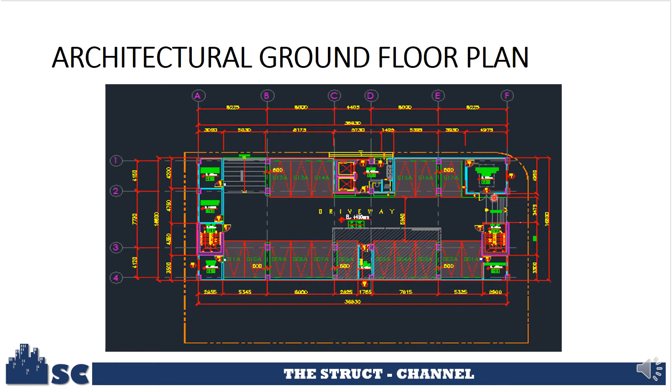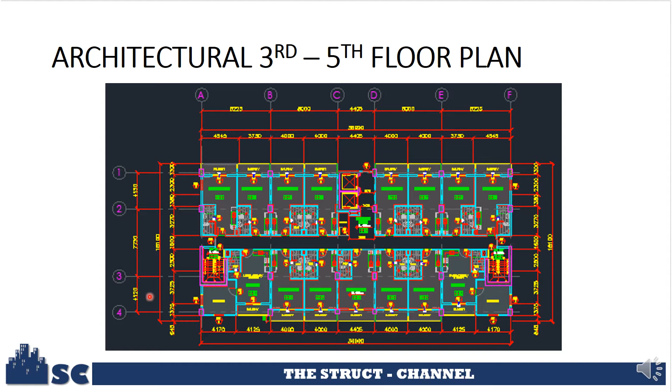This is a typical third to fifth floor plan of the building. The elevator is at the middle or center of the building, and there are two fire exits located on the left and on the right wing of the building.

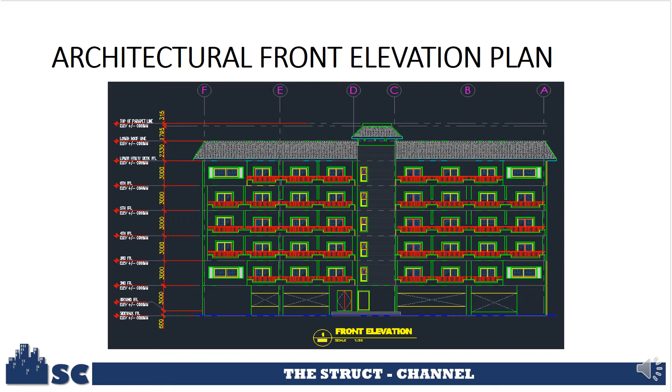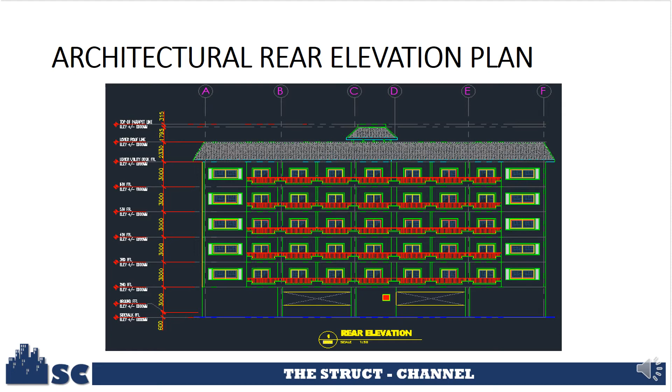This is the rear elevation. Very similar to the front, there are wide window openings and car entrance and exit openings.

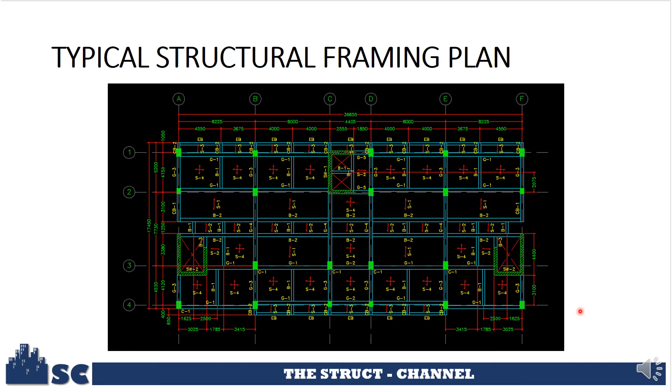This is a typical structural framing of the building. Now, during the scheming part, we were able to convince the architect that we need to avoid a soft story being developed on the ground floor against seismic earthquake loadings. We were able to convince the architect to make us use of the stairwells as shear walls, same thing with the elevator shafts, to produce stiffness and rigidity on the buildings against earthquake loadings.

For the design criteria, design code shall be the National Structural Code of the Philippines, Volume 1, 2015, and all of the material structural properties and the design loads should conform with the NSCP 2015.

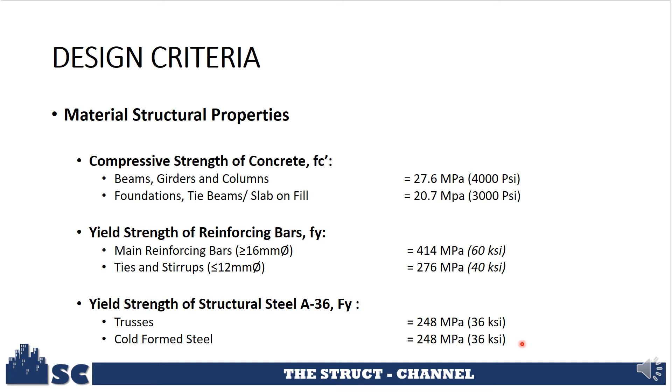The concrete that will be used shall be 4,000 psi for the beams, girders, and columns, and 3,000 psi for the foundation. For the reinforcing bars, we will be using high-grade steel. For the ties and stirrups, we will be using intermediate steel at 40 KSI. For the structural steel, it should be grade A36. And for the purlins, we will be using cold formed steel.

This is a typical design dead load, in accordance with NSCP 2015, Section 204. The slab thickness is 100 mm at 2.4 kilopascal. We have here the loading for the ceiling, the partition, the MEPF, stairways, and the roof load.

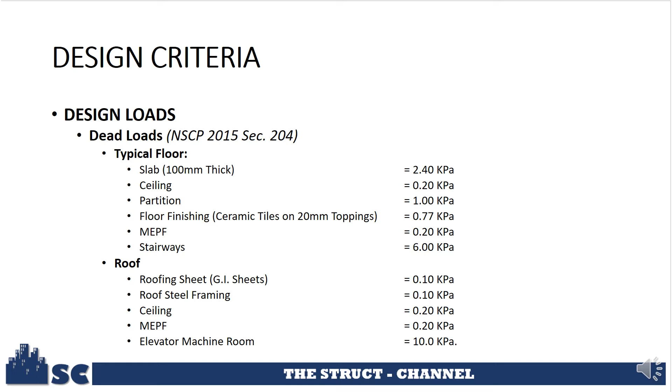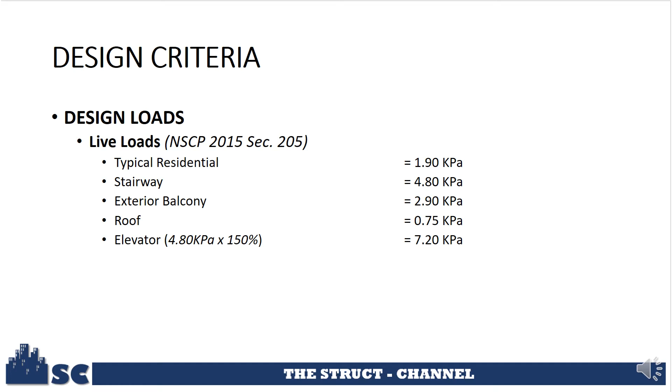For the live loads, we are using 1.9 kilopascal, equivalent to around 40 PSF, for the residential portion, all in accordance with the NSCP 2015 again.

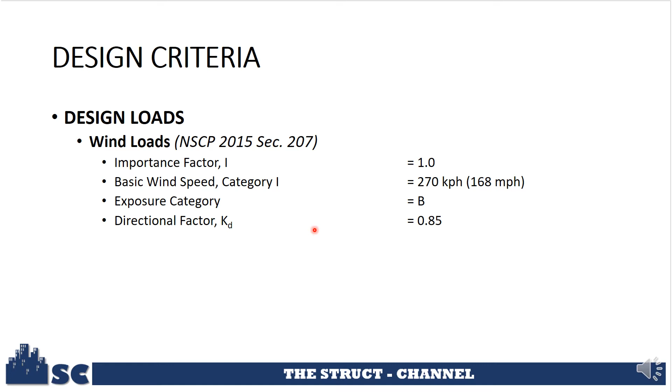For the wind loads, it is in accordance with Section 207, considering basic wind speed of 270 kilometers per hour or 168 miles per hour, in accordance with the wind contour map of NSCP 2015.

For the seismic load calculation, one thing that you will notice is the distance of the project site from the fault line is only 870 meters, so that's a bit close to the Valley Fault System. This is the closest active fault line from the project site.

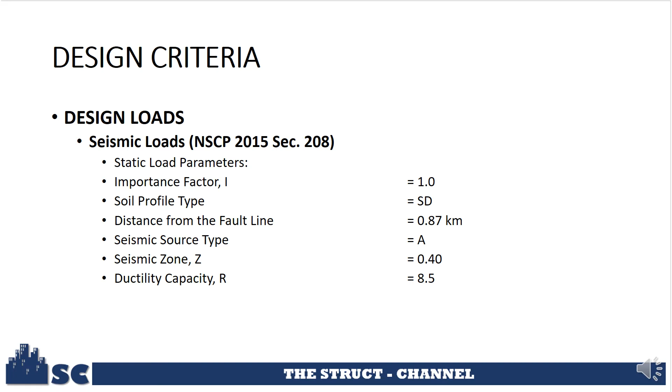Okay, again, for the information of everybody, the Valley Fault System is the major fault line that is crossing Metro Manila. From San Mateo area, the West Valley Fault runs south towards Santa Rosa at the end portion of Silang, Cavite.

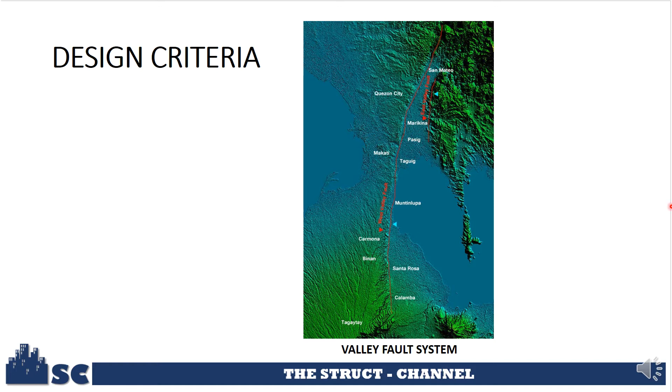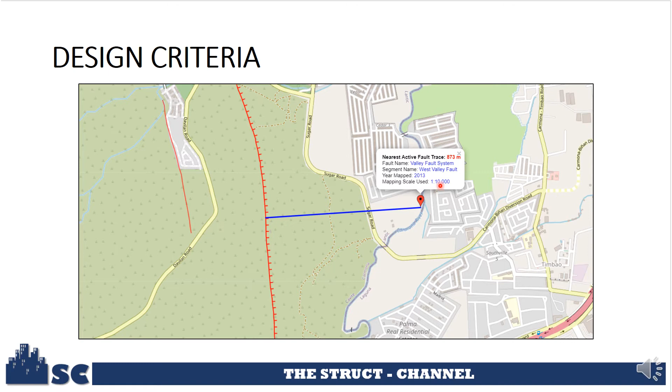Now, if you take a closer look at the site, okay, this is the Valley Fault System. Here is our project site. So you can see that it's only about 800 meters plus from the Valley Fault System.

Now for the purpose of this presentation, we will be using two softwares, Midas Gen 2020 and ProtaStructure 2021. Again, this presentation is not a software tutorial. The objective of this presentation is to illustrate how we applied the use of these two softwares, particularly in this project.

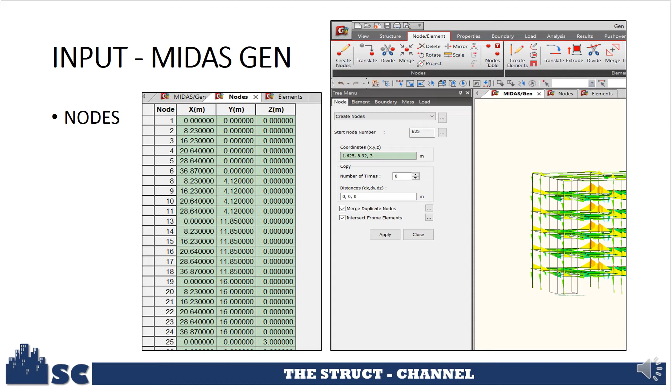So let's start first with Midas. Using Midas, this is how we modeled it. Basically, we input the coordinates of each node of the structure using different techniques in Midas. Okay, that is the input routine using Midas.

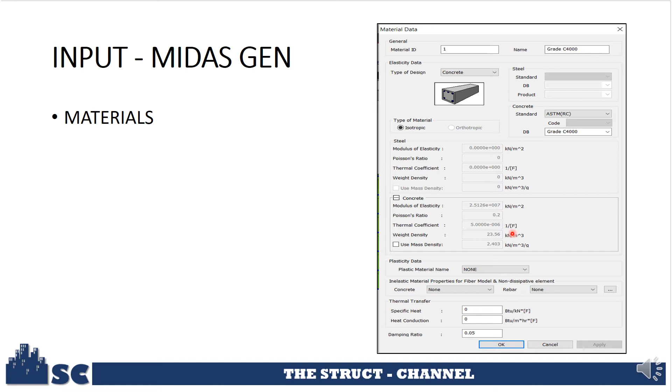This is a 3D perspective view of the model. You can see here the shear wall of the elevator shaft and the shear wall at the stairwell on both wings of the building.

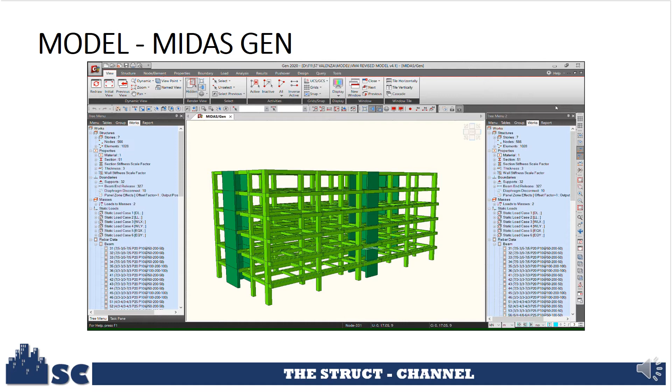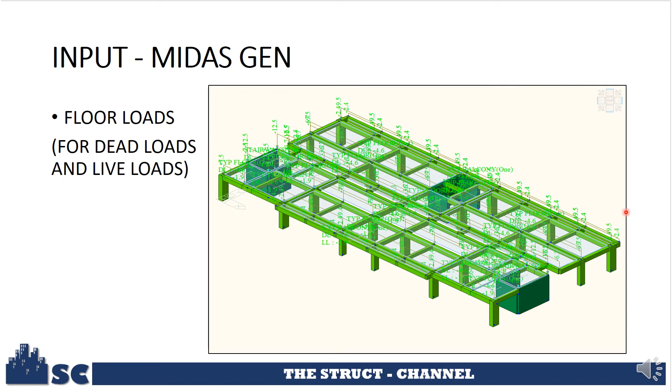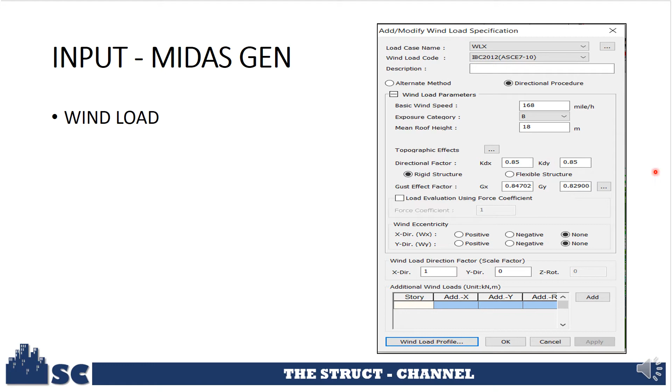Then for the wind load, you need to input the load code. For NSCP 2015, we are adapting the IBC 2012 right now. We also input the wind speed, the exposure, the mean roof height, and other wind parameters for the calculation.

This is the diagram showing the wind load distribution per floor of the building.

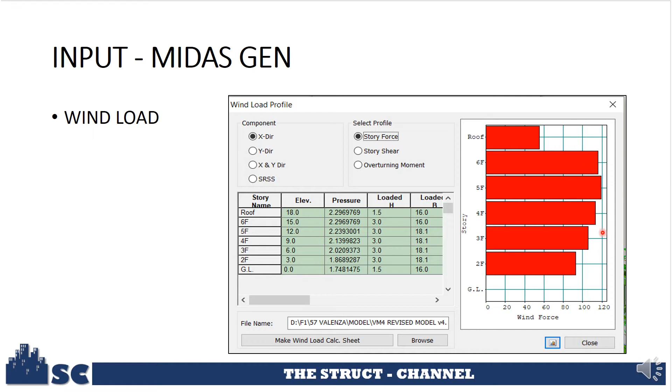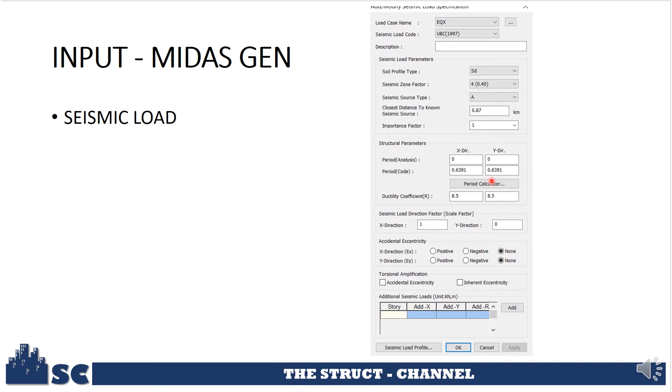For the seismic load, the same thing - you will have to input the seismic load code. Right now, NSCP 2015 adopts the UBC 1997. So you have to input parameters like the soil profile type, the seismic zoning, seismic source type, distance from the nearest fault line, and other seismic design parameters like the ductility coefficients.

Then this shows the seismic load distributions per floor of the building.

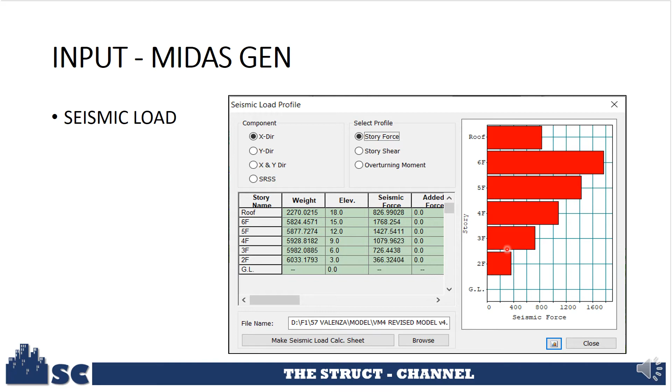From there, the software can generate its analysis, calculating all the shear forces on the beams.

And after that, we can start the design of each element. For this, it shows the Midas output. In beam design, it generates the number of reinforcements at the top, at the bottom, for the left support, right support, and at the midspan of the beam.

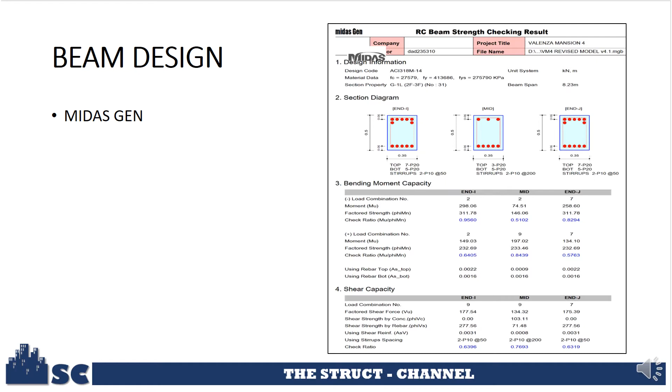Then for the column, this is how the design output for Midas looks like. The design ratios are given in the calculation.

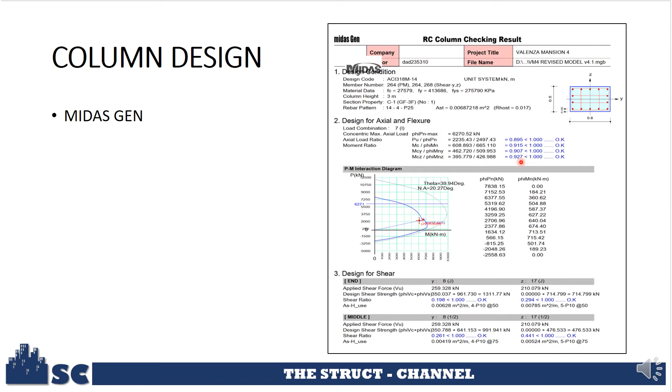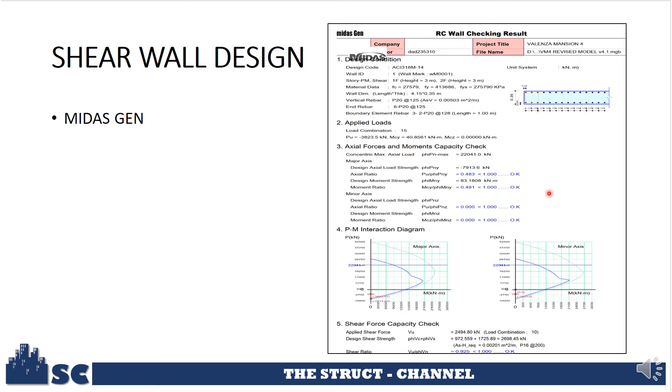Then Midas can generate the total weight of concrete, and in turn we can calculate from the weight given. Knowing the unit weight of concrete, we can compute the total volume required for the basic frame elements such as beam, column, and shear walls.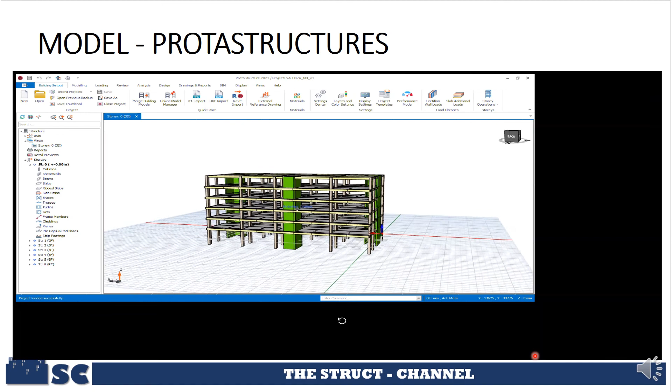That is the model generated by the ProtaStructure software. You can see there the shear wall highlighted.

Now in this ProtaStructure software, you need to define the grid lines. That is the main difference from Midas inputs.

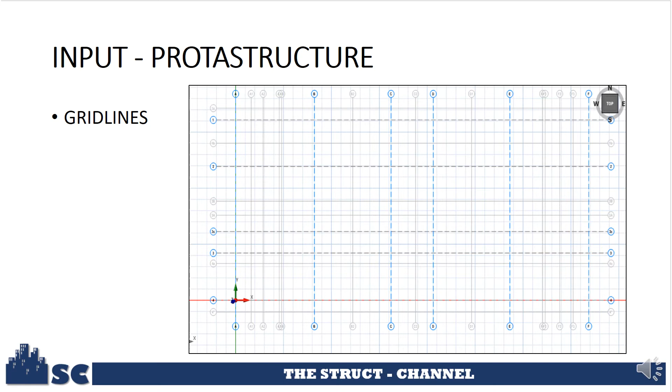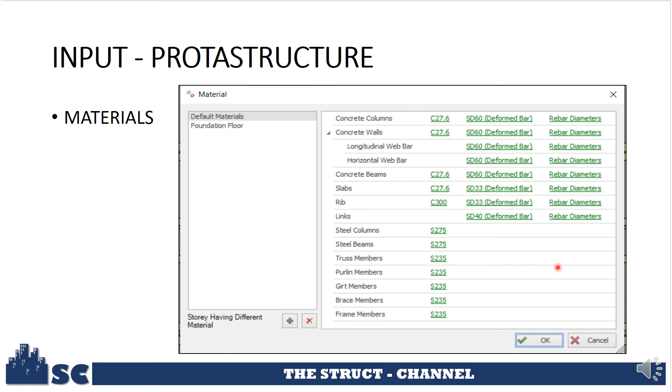Then this is how we input the materials. That is the environment in Prota.

Now these are the routines. This is the routine on how we input the dimensions of the beams, the columns, using this section element routine of Prota.

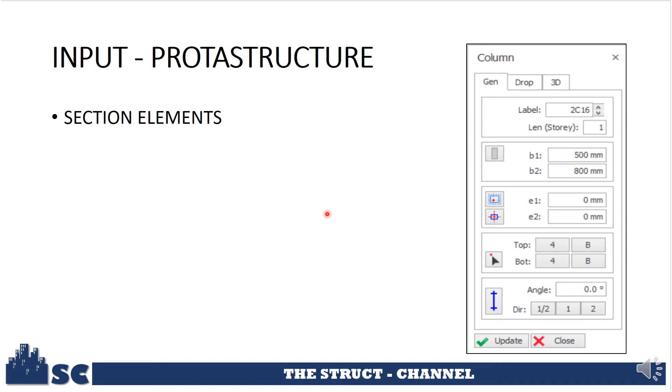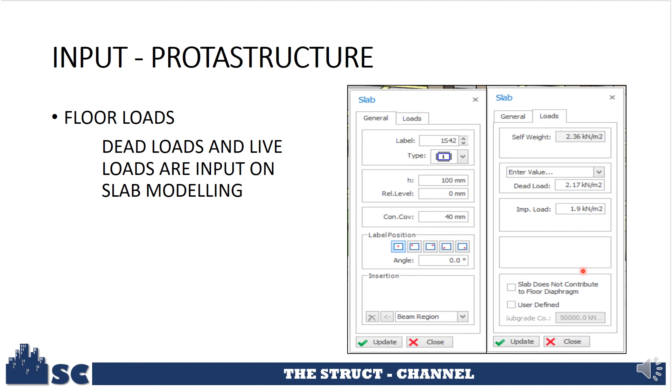Then this is how we define the floor load. This is the input routine in Prota where we input the design floor loads for both the live load and the dead loads.

Then it's quite similar to Midas in how we input the wind loads. You have to input the design parameters, the basic wind parameters, for the wind loads.

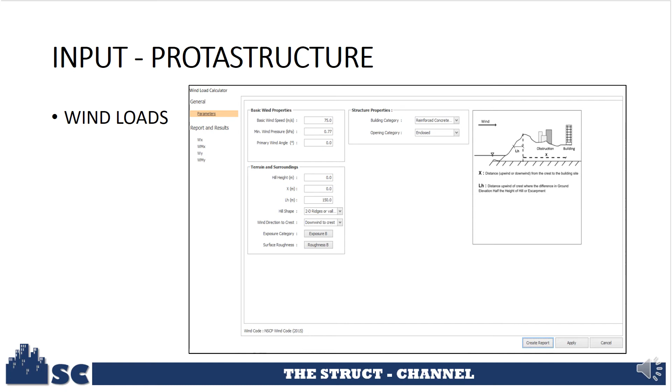Same thing with seismic - you have to input the basic design parameters such as the zoning, the distance from the fault line, and other parameters. If you have to do the dynamic analysis, this is how you input it in Prota.

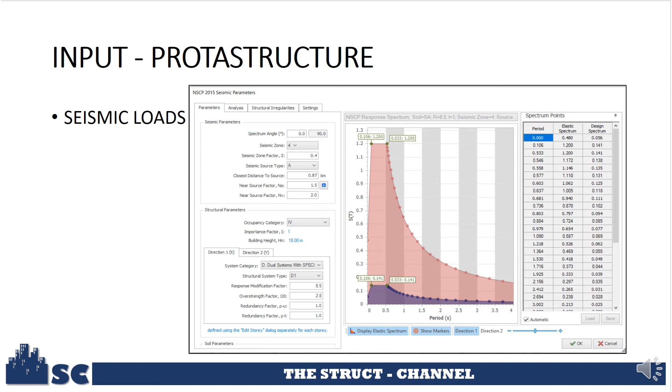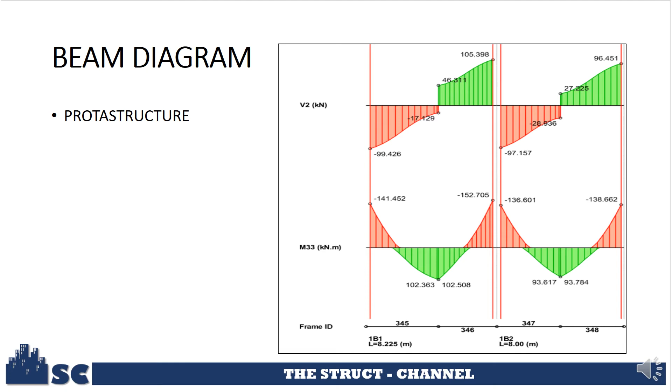But since this is a regular structure and only 6 stories, we did not do any dynamic analysis for this particular building. After the inputs, Prota can generate the analysis - the shear and moment diagrams for each member, the stresses for all the beams and columns, and also for shear walls.

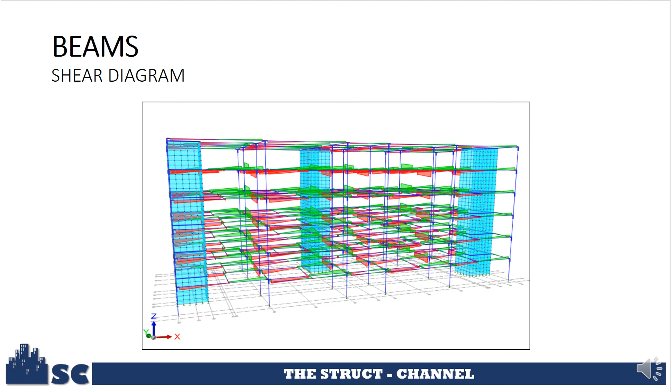Same also with Midas. Now for the design, this is how Prota does the design. One good thing with Prota is that you can see the bar layout on its longitudinal section.

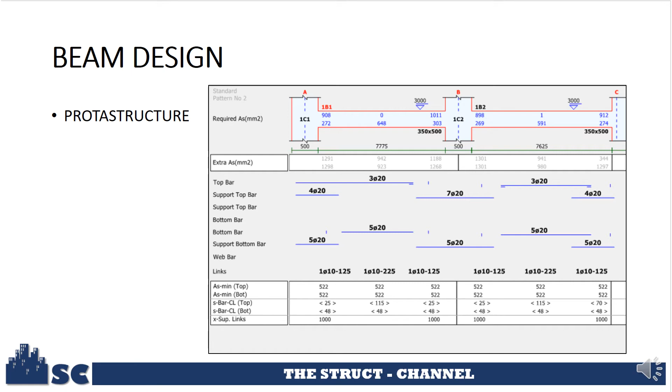You cannot see this kind of output in Midas. This is a sample of a concrete design using Prota.

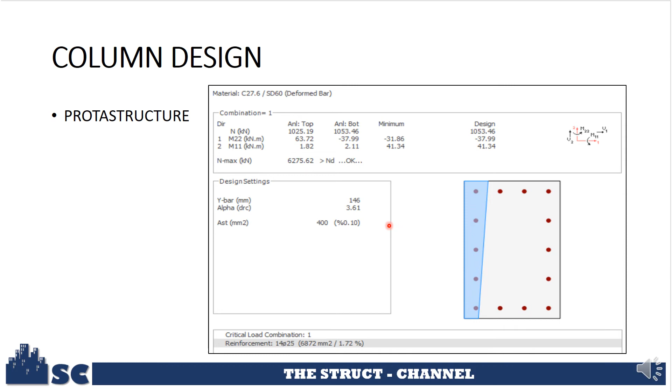You can see there the stresses on the column, the design moment, and the design axial load. And at this part, you can see here the actual design requirement for the reinforcing bars for that particular column.

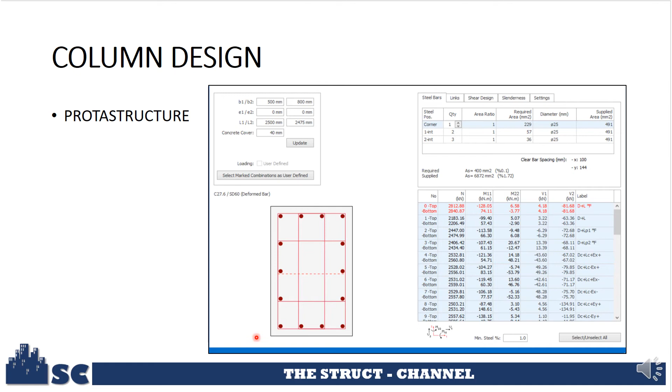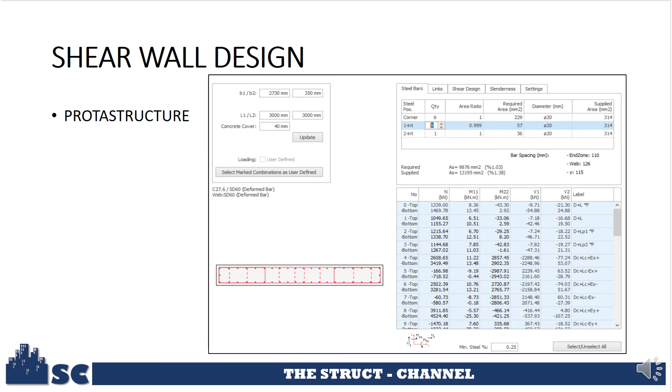After that, we can design the shear wall, so the reinforcing bar layout and the thickness will be considered. It is integrated in the analysis part of the software.

Now, one thing good with Prota is that it can generate automatically the structural framing in CAD DWG format, so it can be exported to your standard CAD drawing title block. So there's no need to encode all these details one by one.

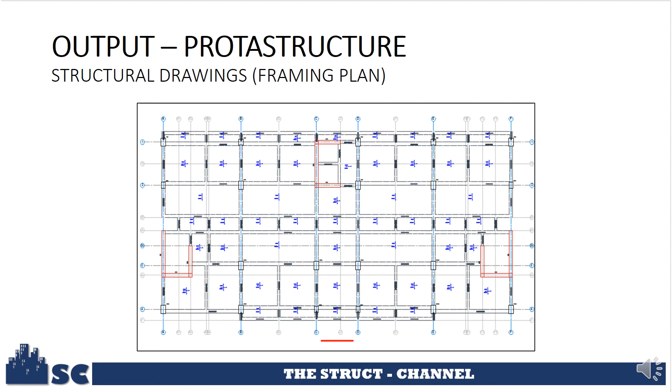Using the drawing part of Prota, we were able to generate the bar cutting list of the beams. The highlighted thick lines give us the design locations of longitudinal reinforcement, and it is tabulated here. It can also be generated in DWG format.

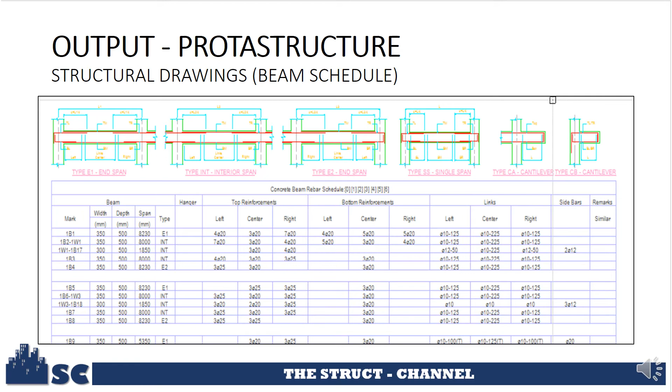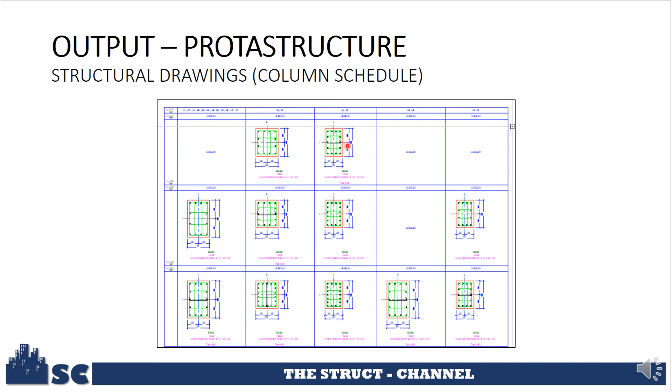Likewise, it can generate the column schedule from the lower floor going up, giving us the column tie layout with the column dimension, and the cutting list for the columns.

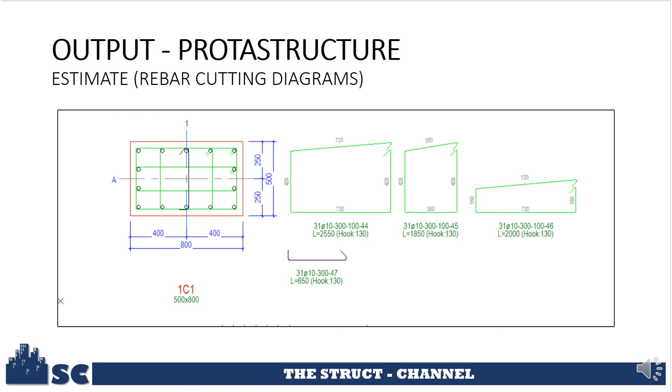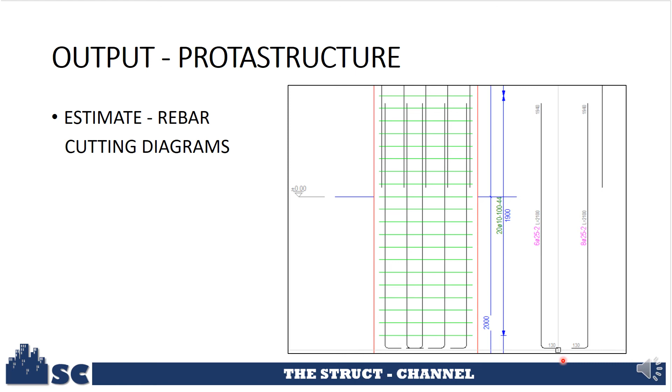Then the splicing for the rebar can also be generated. The bar cutting list for the column rebars can be generated. And for the estimate, the Prota estimate part can generate the total weight of reinforcing bars needed and the cutting list.

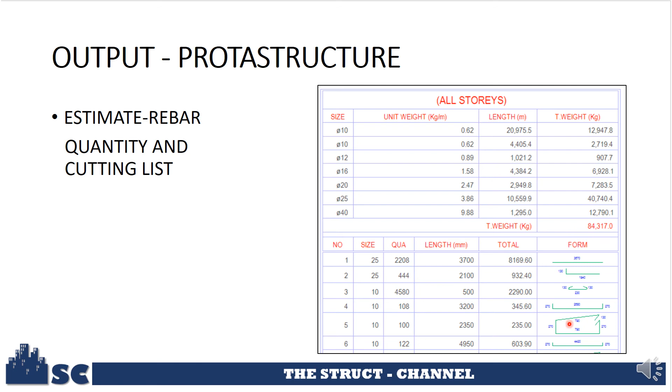Now, I just want to warn that the Prota bar cutting list is only for the purpose of doing a good estimate of the kilograms, because the software only uses one source length. For example, if you input the source length to be 6 meters, it will only use a 6-meter length rebar.

In the industry, for the interest of the contractor, to minimize wastage, usually in preparing their bar cutting list, they use all 5 commercially available lengths in the Philippines, which is 6 meter, 7.5, 9, 10.5, and 12 meters. So this is still good as far as the initial estimate of the rebar.

Now, just to give you a comparison of output between Midas Gen and ProtaStructure: on the left side of the screen you can see the dimension generated by Midas, 350 by 500, which is the same as what we got from ProtaStructure. Same thing with the reinforcing bar, 3-20 millimeter on the left, and for Prota we also get 3-20 millimeter. It should be the same.

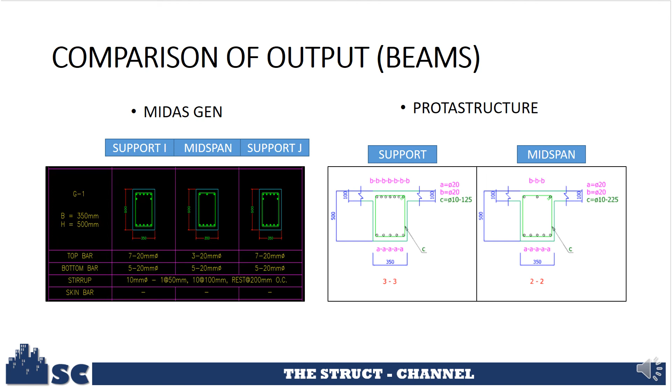Same thing with the column, we get the same sizes, 500 by 800, and the same number of bars. For Midas Gen, 14-25 millimeter diameter, and also 14-25 millimeter diameter using our ProtaStructure.

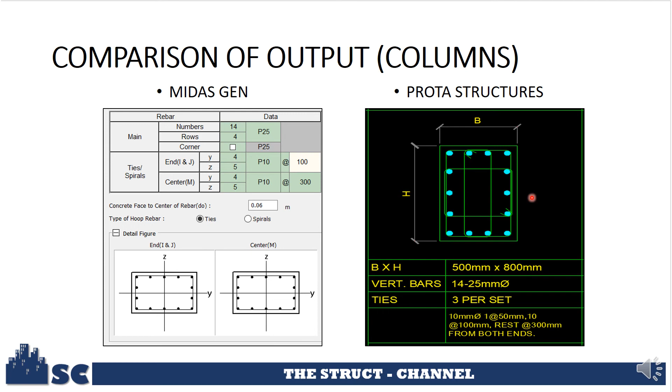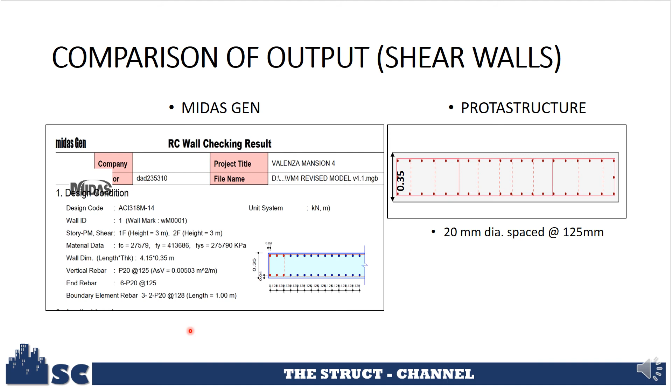And for the shear wall, both Midas Gen and Prota yield 0.35 thickness of shear wall with the main reinforcement at 20 mm diameter spaced at 125 mm. So basically the design is very similar.

Design ratios. This is the main reason why our team experimented using two softwares in this project. We acquired Prota software last year, 2020, during the pandemic, because we had so much time to experiment and study.

Now, the items at the left are the items usually used by developer clients as benchmark in our design, for them to gauge if our design is economical. So the first one is what we call the concrete ratio. It is the total volume of concrete in cubic meters per floor area.

So that is in cubic meter per square meter of development area. Usually in our previous projects, for a 10-story regular building, the client benchmark was 0.45 cubic meter per square meter of floor area. For this particular project, we were able to generate a 0.38 concrete ratio, which is lower than what the client expects at 0.45.

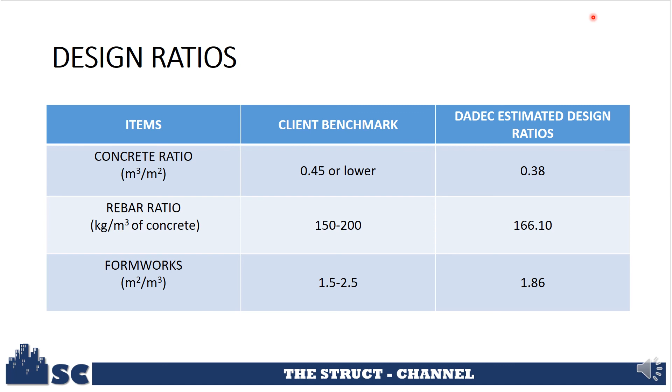So we are not promoting any software here. Our presentation was just an application in our team, because the objective for us is to generate the design ratios, the estimate. Aside from doing the correct design using the software, we have to generate the design ratios as quickly as possible so that we can gauge if our design is within the expected output by our client.